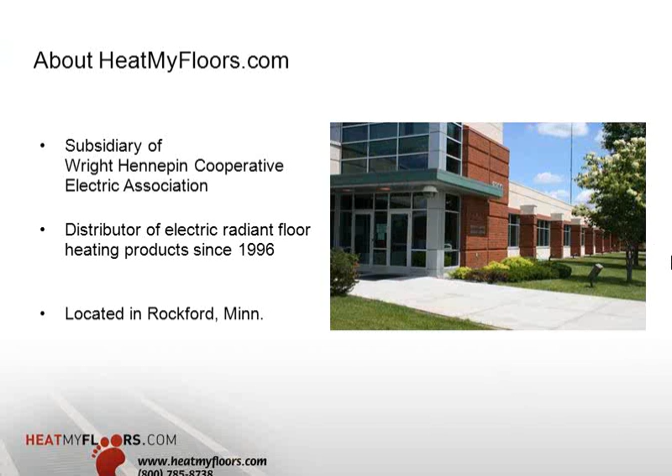Let me first talk about Heat My Floors, if you haven't joined us in the past. For some of you who've seen us already, you'll notice we're a Wright-Hennepin, an electric utility out of Rockford, Minnesota, and we've been distributing radiant floor heating systems since 1996, from electric boilers to electric radiant floor heating systems such as STEP Warmfloor. The purpose of Heat My Floors is to provide quality, energy efficient products that we believe in as an electric utility, and pass those on to our member consumers as well as customers across the nation. We're located just west of the Twin Cities. Rockford's a small town, about a 45-minute drive from downtown Minneapolis.

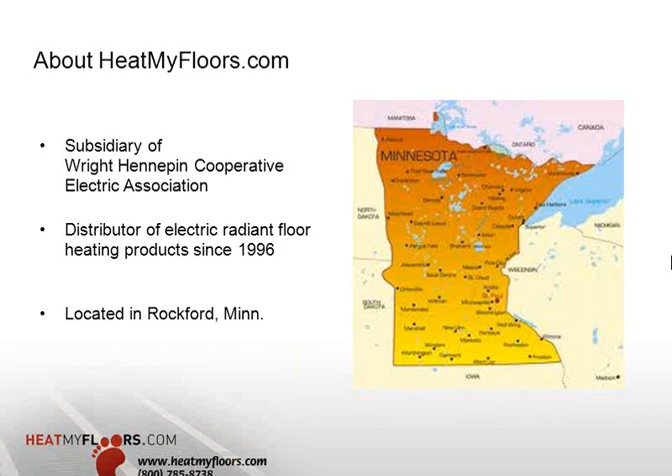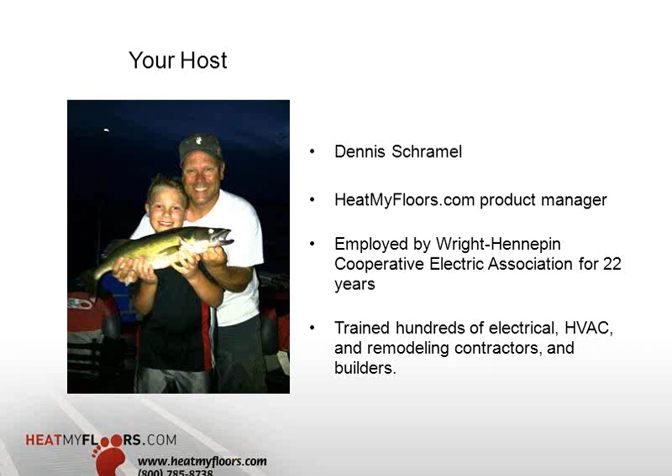Your host, me, Dennis Schramel. I am the product manager here for Heat My Floors. I've been here for 22 years and trained hundreds of contractors, electrical, HVAC, remodeling, architects, builders, you name it, regarding not only STEP Warmfloor but other radiant floor heating products. A colleague of mine said that fish I caught, that you see on the screen, is actually one I had to throw back because it was too small. So that kind of gives you an idea of Minnesota — we've got great fishing around here.

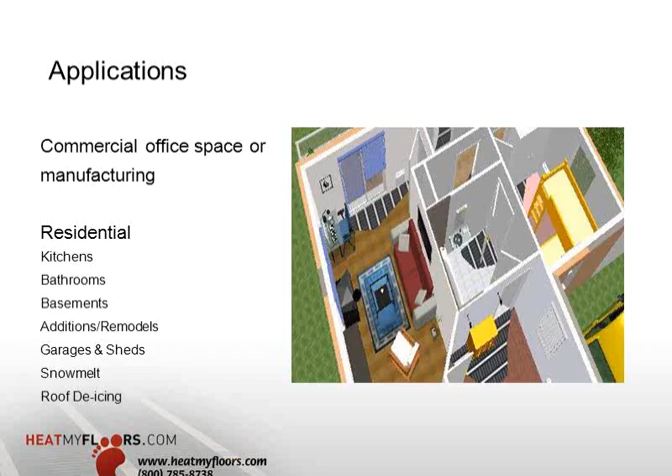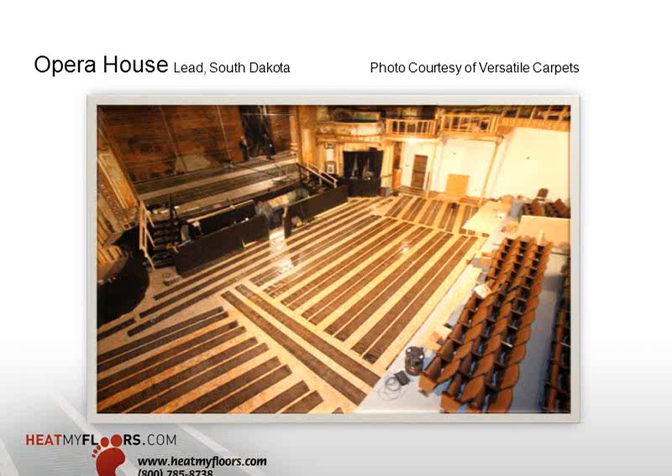Another one - my friend Tim, in Spearfish, South Dakota, has done this job with the Opera House, and you can see by the slide how nice and even the heat is. I toured this building, and it was amazing how they previously tried heating with an inefficient type of system. Now this Opera House is going to be a comfortable and enjoyed space for people in the audience as well as those on stage. Hats off to Tim - it was quite an accomplishment to see such a big job done with energy efficiency that's going to pay back the system in virtually no time.

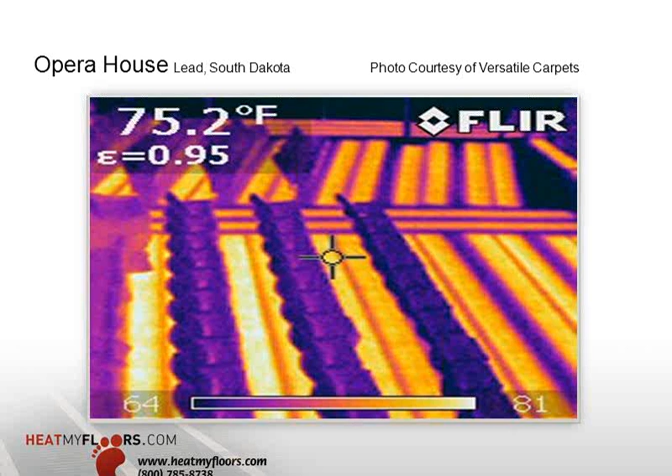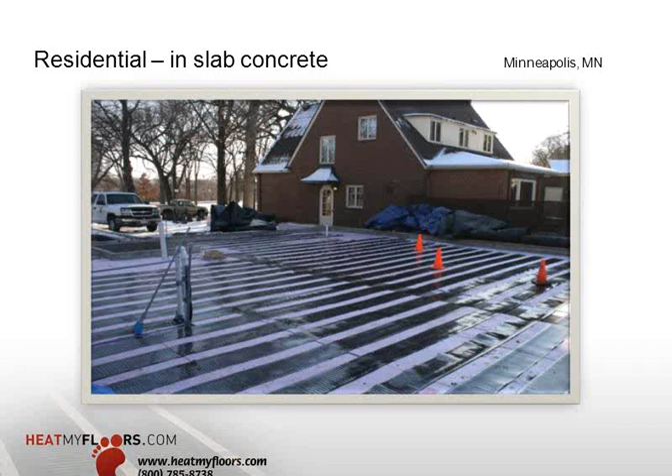Why give your business away to HVAC or hydronic guys putting water tubing in? If you're an electrician especially, this is part of the business that you used to have and dominated with cables. The cables had a period where they faltered, but STEP Warmfloor is one you're going to find is an energy efficient solution as a primary heating source for your customer's home.

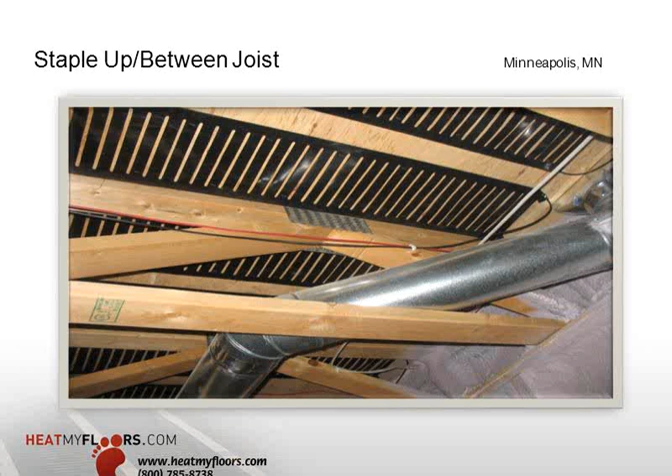How many homes have you gone to where people said, 'boy, I wish I could have put this product in'? Well, they still have that opportunity to put this in, even though they don't have to change out their tiled floor above. From a snow melt applications standpoint, I'm not going to talk about this in depth, but it shows you the wide applications STEP Warmfloor can do.

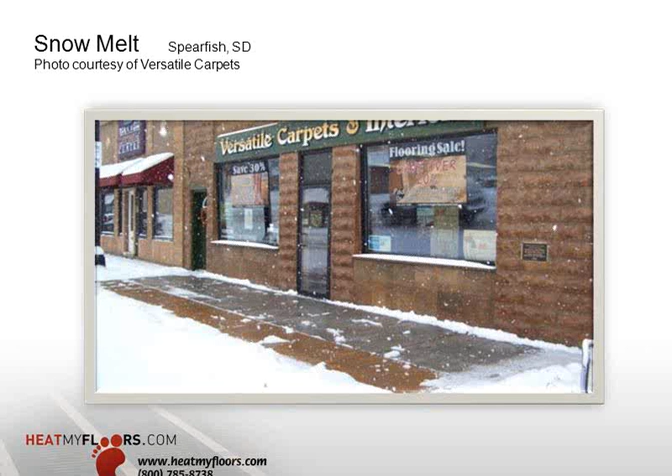What better storefront for Tim over there in Spearfish, South Dakota, to have this available so clients can see it - but you can also see his neighboring businesses still have snow on their sidewalks. It's a nice, powerful statement there, as a showroom.

And then you've got roof de-icing systems - what an aesthetic way to take care of the problem of ice dams. It's a nice aesthetic and energy efficient solution to melt those ice dams and potential headaches away.

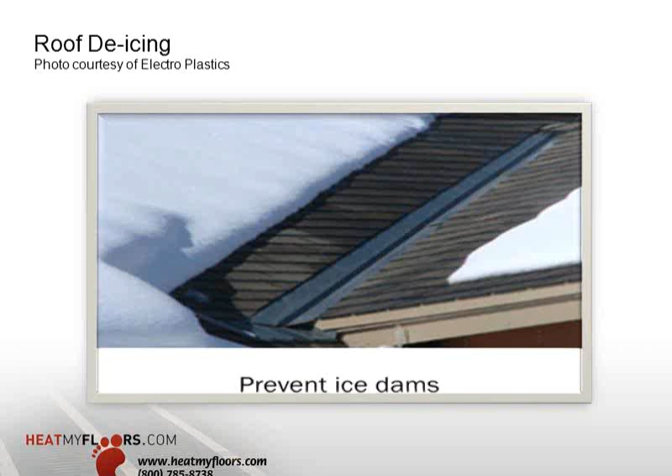All the way to unique applications like this one with RVs - our little history here is that we've been approached by a number of RV owners looking to provide comfort heating in an RV, and what a perfect solution STEP Warmfloor can provide versus their old forced air type heating systems. This particular application we're working with is going to be a primary heat source for this motorhome.

This is going to be parked down in Mesa, Arizona, and the customer is very, very excited about what they're going to be able to do and provide the heating in their RV. Even though down in Mesa it doesn't get that cold, sometimes it gets down to 35 degrees.

So STEP Warmfloor is a perfect solution. He's very excited to show off his RV to his neighboring RV neighbors out there in Mesa. So we're excited to see that project come to be.

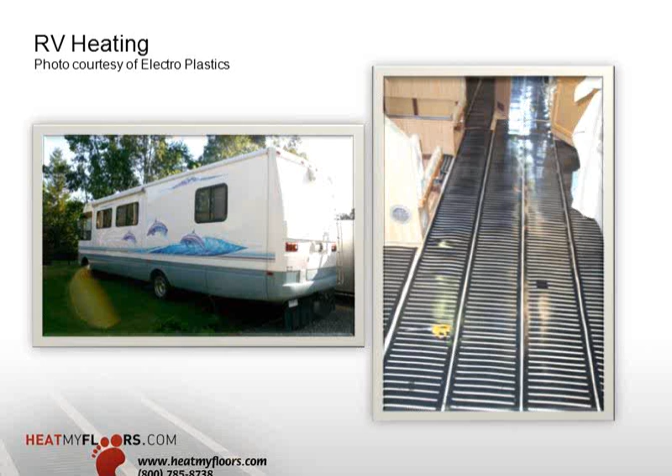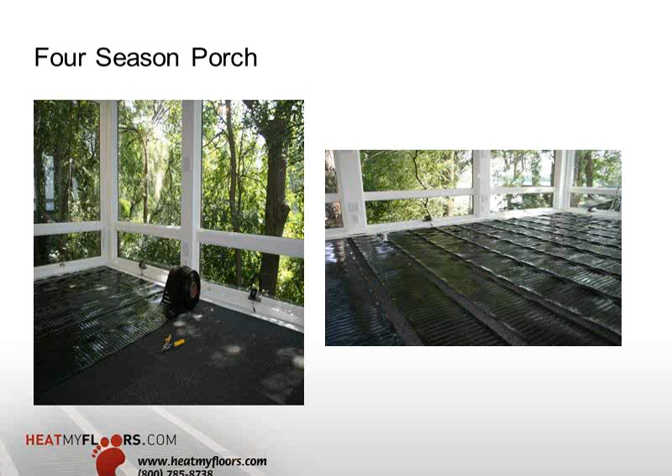All the way from four-season porches - some of these porches are virtually impossible to heat as a primary heat source because of their high heat loss loads. But STEP Warmfloor is a good way to either provide that primary heat source or a great supplemental way. Now we're going to utilize that four-season porch, what it's meant for, all year round.

This guy was so ecstatic about the whole project and how the system performed for him and the energy costs. He literally sent me the whole CD of the collection of every picture taken on every step of this project. He was so proud of it. He's very, very pleased with the results.

And obviously you got bathroom floors, and that's an application where electric radiant heating cables have dominated and found their niche for many, many years. But I've been in this business long enough, and you always hear the horror stories that contractors, tile contractors, tell about cable systems that have failed due to one reason or another. Then it's the blame game - who do you blame it on? Is it the tile guy? Is it the electrician?

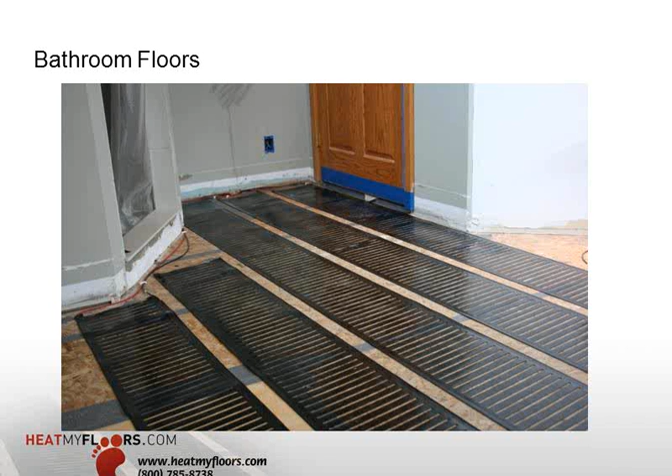So these are the main ones, and I wanted to show you tonight because of the commercial aspects of the product as well as the residential ones. So when we look at STEP Warmfloor, you may recall from the earlier webinar that we can do primary heating, whole house, new construction, or commercial, anywhere down to small bathrooms. So all points in between, from large manufacturing down to a bathroom, STEP Warmfloor is a solution for it.

Kind of covering the left-hand side of the column there, as a primary heating source, typically the STEP Warmfloor product is going to be installed in the concrete or on top of the slab. Now we're always going to suggest, or actually require, a heat loss calculation to be done - that's something you don't have to be an expert on, let us do the heat loss for you and design it, because that heat loss is so important to make sure we get enough heat capacity to provide that primary heat. The heat loss and floor coverings will determine the element spacing, and I'll cover that again on our next webinar.

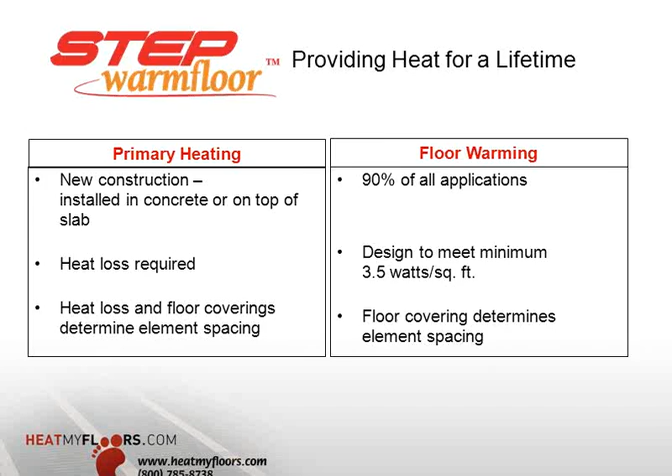So with that, the heat loss is really critical in sizing the heating needs. It's going to help us a great deal, and you don't have to worry about this—we'll take this design challenge out of your hands.

What we'll need from you is a dimensional drawing of it. A lot of times we'll get a drawing from AutoCAD sent our way, something we can use to determine the heat loss from it.

It's also very important, in your conversation with the Heat My Floors rep, that we know the job location, because we need to know the heating degree days to build into the system. Along with that, it's very important that we know the R-value of the walls, ceilings, what slab insulation they may have, the slab edge insulation. Those are all critical factors so we can size it appropriately, protecting you, the contractor, knowing the system is designed and sized right to meet the heating and comfort needs of your client.

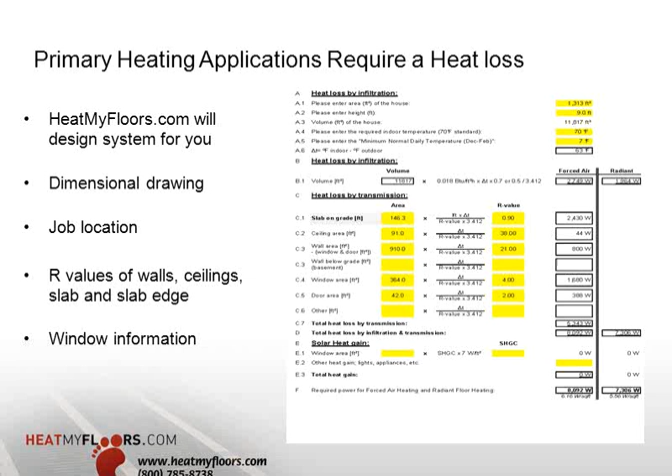Also, window information is very important. What's really unique is that the heat loss is a calculated measurement, versus what I'll show you later where manufacturers used submetering to actually compare measured data versus calculated data. It's interesting to see what their product has done, and we're conducting our own system tests here that I'll talk about in a few minutes.

So energy consumption is obviously a big thing on the customer's mind. It's not only the front-end cost—a lot of people look at that as the determining factor if they buy or sell—but you've got to really sell them on the energy efficiency side, the return on investment. With STEP Warmfloor, it's a product that's really going to put money back in their pocket after they've had that initial return on investment.

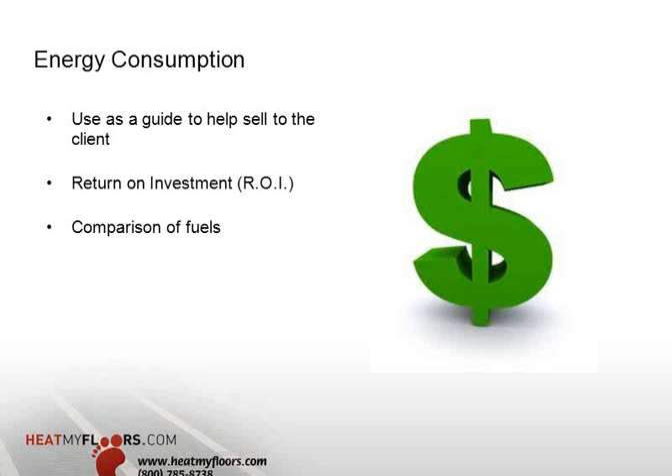Some of the tools you'll get with the design and layout include a comparison of other fuel types, or comparing electric cables with STEP Warmfloor—I'll briefly show you some of those slides too. Each one of your designs will have a system return on investment. You can see on this one it's approximately right around 2 years; we generally see between 2 to 4 years on that return on investment, which is a very good payback time.

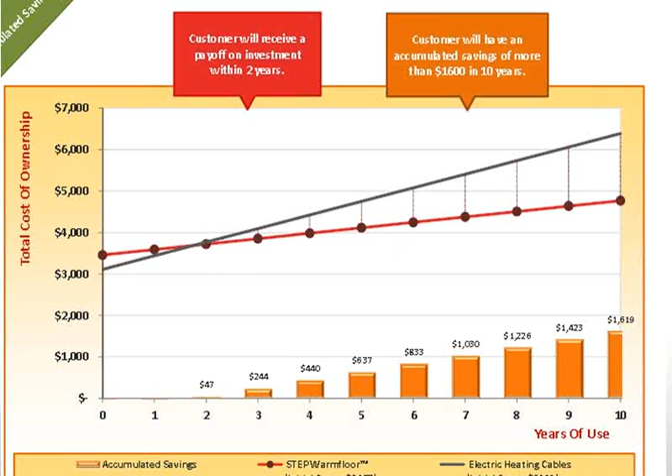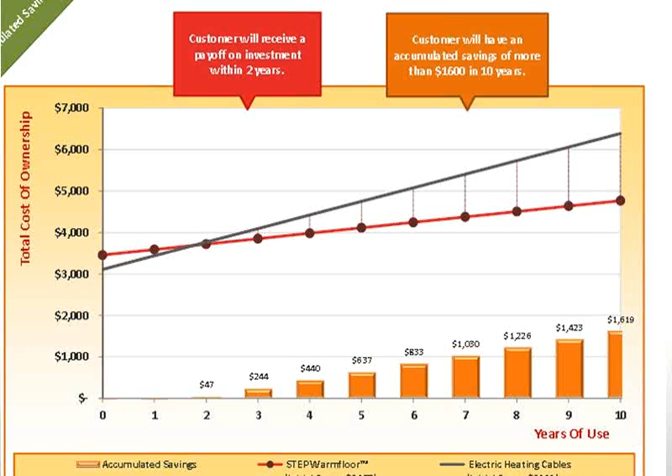This is one way you can show your client that, yes, you're paying maybe a little more premium than you would for a cable system, but you'll have that payback and the comfort of knowing the system will be there for many more years to come versus cable systems. This slide may look confusing, but it'll give you a comparison in energy, kilowatt hours, from a forced air heating system down to radiant floor heating hydronic systems, all compared with STEP Warmfloor. So you can really see the dollars based on where that person lives and the heat loss—it gives you an actual dollar amount in operational costs that can help you determine that return on investment.

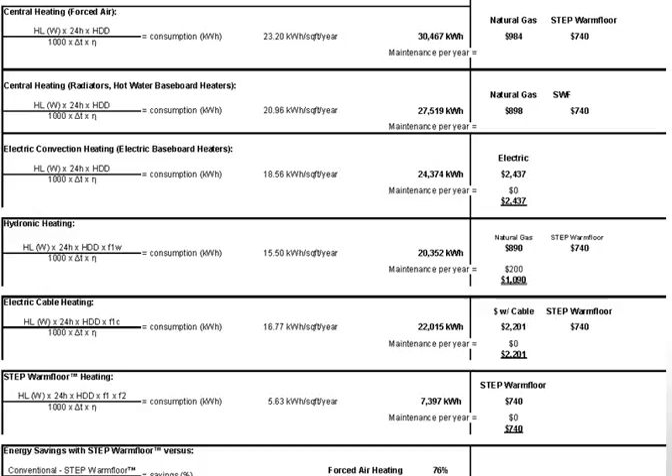Okay, we're going to jump into this commercial case study. You're looking at the building of Electroplastics, the manufacturer of STEP Warmfloor product. This building is in St. Louis, and it uses this as its primary heating system. It's comprised of a manufacturing facility and office space, just shy of 35,000 square feet.

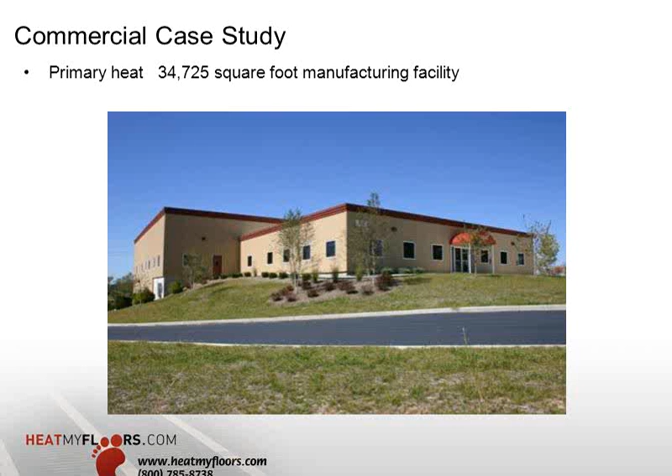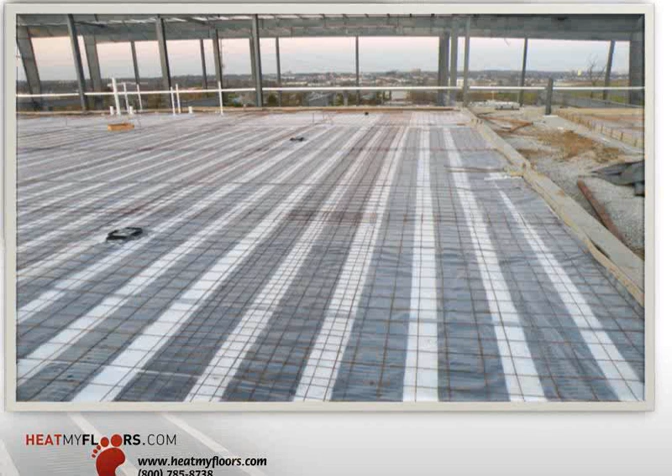In this slide, you're going to see the element being put down. Below it there's a 10 mil plastic barrier because we don't want metal touching the heating element, followed by a 4x4 mesh to reinforce the concrete and get everything nice and stable.

This gives you a nice, clear look at the spacing of the heating elements, because poured concrete is going to go over the top of this. But it's a nice, easy, clean, efficient way to heat that commercial building versus other applications.

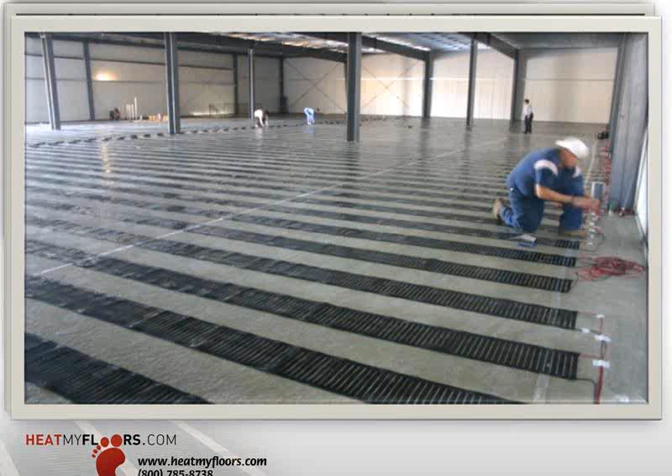Here is a picture, I believe, of the second floor. This is over Spancrete, so there's going to be a concrete pour on top of this. In the foreground you see an electrician making the wiring connections. This is a nice, easy way, and this is how they heated their entire building.

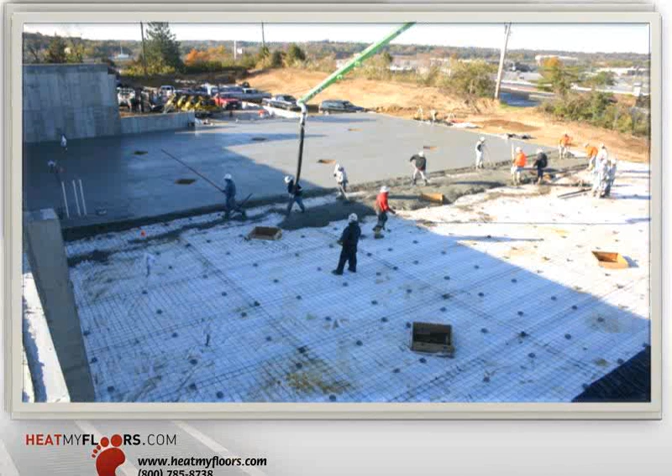There you've got the guys pouring concrete over the top of it. This building is quite fascinating to go see, and when you're actually in the space, I've been in there in the cold in February, and it's just a beautiful comfort zone. Lucky employees who get to work in there versus some other applications where they have forced air and it simply isn't warm enough.

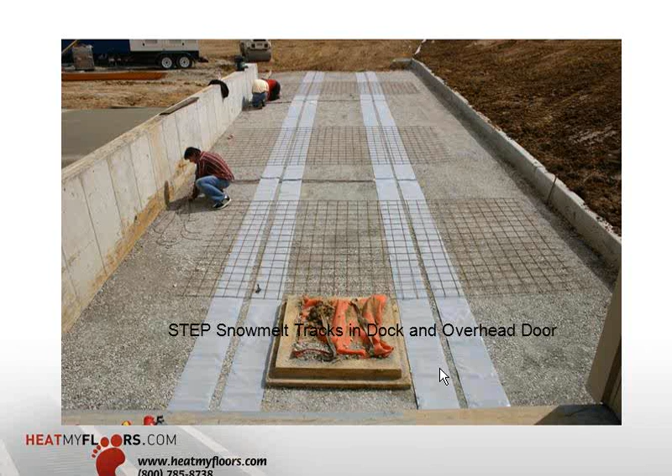This product has changed a little bit from its initial stages. Here it's in a vinyl, but now STEP has managed to put a plastic material over the heating element, so it looks quite different from what you see here, but the results are the same.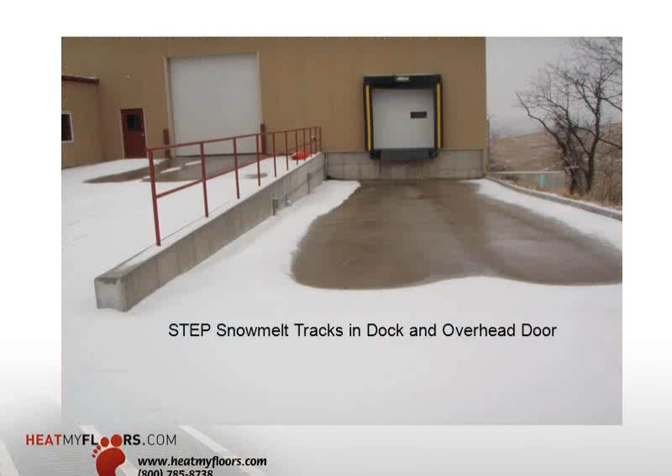What a great way to provide snow melting. They also have this in the front of their building, and you can see it does a great job. You've got two elements around where the tire tracks would be, and you can see the nice melting pattern it has on the dock doors.

The beautiful thing is in the numbers when you look at their building. The numbers really show that if you build with conservation in mind and couple it with a state-of-the-art, energy-efficient heating system like STEP Warmfloor, you can reap the rewards of low cost heating. Personally, looking at these numbers, we're at 0.73 watts per square foot.

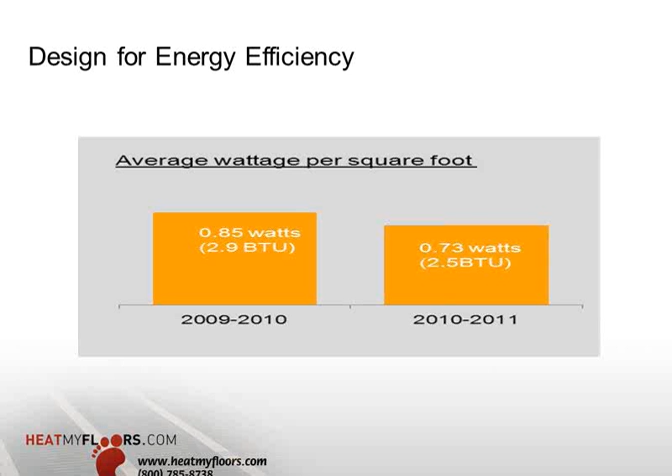The year before was a little bit colder winter. Anybody, especially in Minnesota, knows it was a colder winter in 2009, 2010. I've done some calculations on our building, which is done with geothermal heating, all forced air geothermal. Believe me, more than once the people in IT can attest to always having to adjust temperatures, because it's not zoned properly for everybody's comfort needs, whereas STEP Warmfloor is a perfect solution for an office building.

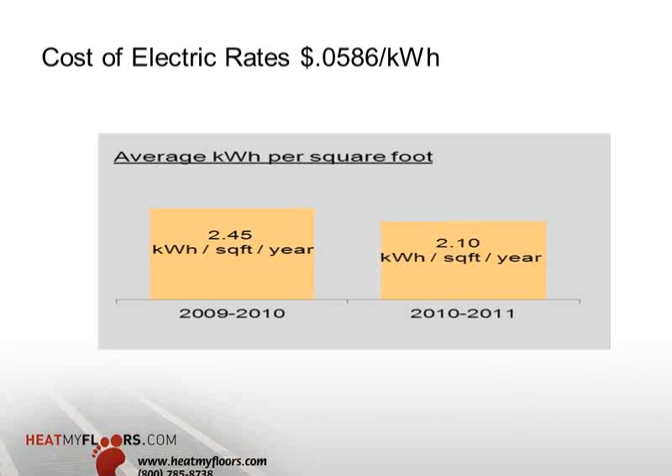Let's further touch on this. The electric rates may have changed since this was done, but it was costing about just 5.8 cents a kilowatt hour—very, very low cost per kilowatt hour. But really, it's in the next slide that tells the tale, because the energy consumption is fascinating.

You can see from 2009 to 2010, the consumption of energy was higher. The cost per kilowatt hour was a little bit lower than in 2010 season 2011, but look at the operational costs. It's amazing that you have a 35,000 square foot facility, and they're heating it for $4,164 a heating season. I've done that with geothermal in our building back in 1994 when we built it, and I was getting around $1.08 per square foot. So the bottom line is that they're spending roughly 14 cents per square foot per heating season.

It's fun when you talk to an architect and tell them about that, and they just shake their head. They've never heard of something like that. But it just goes to show you that if you have the foresight to build a building with better insulation materials, better windows, and a great heating system, your clients can achieve these dollar amounts too.

If I were to extrapolate that into Minnesota's weather and our electric rates, we'd be around 58 cents or 56 cents a square foot per heating season, which is phenomenal, because the average office building in the U.S., according to the Department of Energy, spends an average of $1.10 per square foot per heating season. So the people at Electroplastics know what they're doing, and the energy consumption of their product is fantastic.

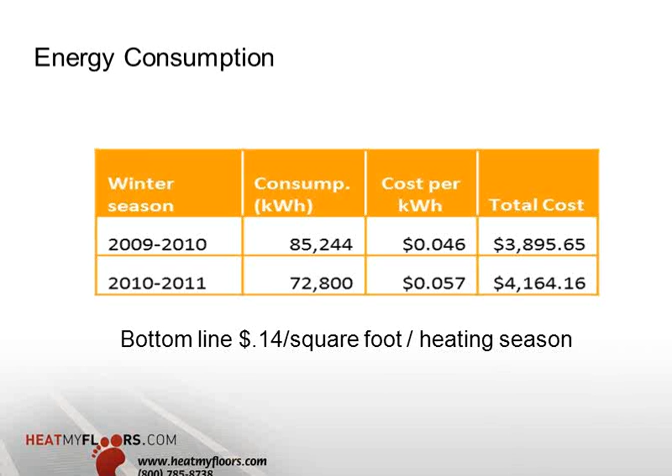We're going to jump over now to some residential applications as a primary heat source. Here is a building we had the joy to really work with an architect on and design a system for. The customer was very concerned about no maintenance, and wanted a system that could integrate with their solar panels. You might just catch the solar panels on the edge of the roof there, but there are 36 of them located throughout, and they wanted the home heated with a renewable energy source.

We did some calculations through a heat loss analysis, of course, because we wanted to ensure comfort. It's projected to heat for $740, and I'll cover a slide on that in a little bit. This home is surrounded by natural gas everywhere, yet it's total electric, and it's used as a primary heat source to heat it. What a beautiful home it is.

This is how it kind of started out. You can see the homeowner actually lives in the house in the background there as they were building, so they're really building right next to their home.

What's unique about this is that the contractor did a fantastic job. In fact, this was his first job ever with the STEP Warmfloor product, and he laid it out very nicely. Obviously, concrete gets poured over the top of this, but the key was insulating underneath it. You can see there's some 2-inch polystyrene down underneath, and then there's slab insulation, which I don't have a picture of, but it runs all along the edge to prevent heat loss from leaking out. So it was designed to provide and contain that heat.

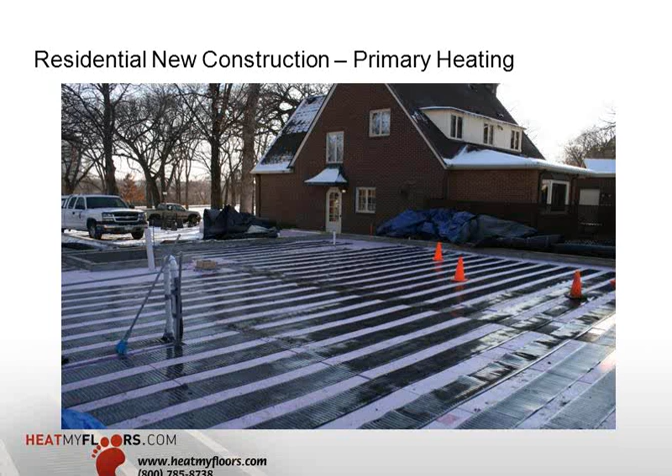So we look at these layers, and this is my own animation of what you have. You'd have your foundation edge to prevent heat from going down, then a sand gravel mix all leveled, followed by 2-inch polystyrene. You'd prep this, and many of you have seen hydronic installations where they put 2 inches of high density extruded polystyrene down, and that's a perfect way.

There's other insulation materials out there, one called the barrier that guys will use, but this one is probably a little bit more readily available at your supply stores or building centers.

But then it's followed by the heating element. Now we're containing that heat—it can't go down, and it can't go outside. So we're going to build a little mass, because now we have the concrete being poured right over the top of it. This job actually had about 6 inches of concrete, and what the contractor was so thrilled about was heating that slab up after they poured it to help aid in the curing of the concrete.

The architect, incidentally, this was his sister's house, so he wanted to ensure everything in the materials here were what she expected with a renewable heat source. They were just tickled that they could heat the system up and aid in that process of curing the concrete.

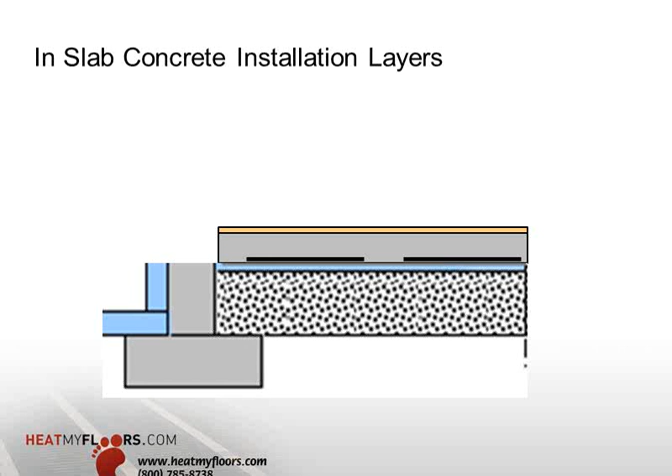Then you follow with your flooring type, and obviously you can do any flooring type—tile, carpet, bare or stained concrete, to wood floors. They happened to do a combination of carpet and a lot of wood floors. So what a great solution.

One installation tip, and this is what you're going to see—if you're doing the system for the first time, you'll learn the little things where you can build up your speed. It's kind of like riding a bike, is what I tell contractors. The first time you might stumble and fall a few times, but the second time, the third time, you're going to gain experience with the product, so you'll save a great deal of time.

One of the tips I want to let you know is you really need to refer to the design and layout that we provide for you. That's your roadmap to follow, to help you go through the layout of the element, how it appears on the floor, to the loading of the elements and how they tie to the transformer.

That is so key, and I can't tell you how many times I've talked to contractors—people out there say, oh, there's the instructions, well this is like the Christmas gift, I'll just put it in without reading the instructions. I think they get kind of confused sometimes, so they've got to go back to this, and that's the purpose of that design and layout. Electro Plastics has done such a great job in perfecting it.

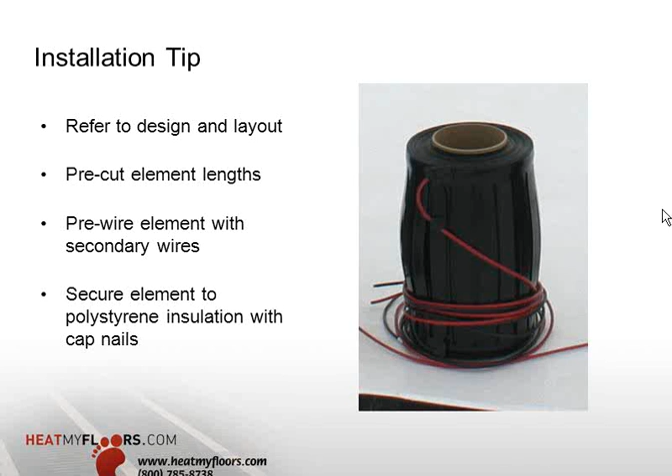And I showed you the conduit going up there too—they protected wires where they could, because you've got guys coming in there with wheelbarrows and pouring concrete. So they thought it out very nicely on their first job.

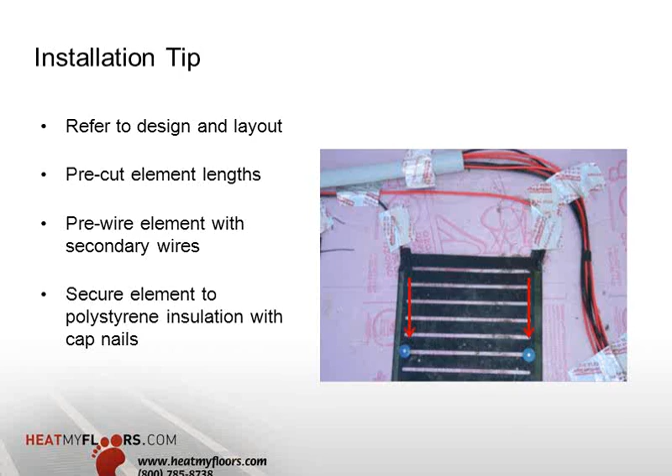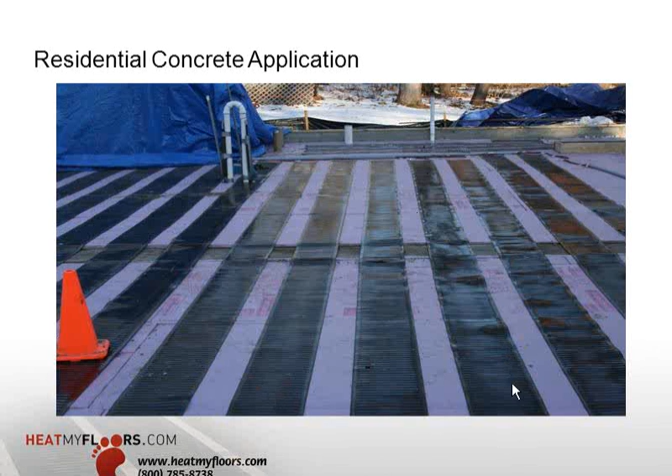This gives you an idea of the elements that are all connected on one end. Here's where the conduit runs into the transformer lines. You can see all the elements strung out there, and with this one, all the elements were connected on one end. I think they're around 28 feet, 27.5 feet long, each of these. And here's the transformer location.

Incidentally, there was 701 feet of element laid in this application that you see. They're spaced approximately 7 inches apart, which is what it called for to meet the heat loss demand and get a certain watt density.

So here's a centralized transformer. Knowing where these transformers are going to be placed is a lot easier to do for new construction as opposed to an existing home where you have a lot of finished spaces. But this was a room only accessible from the outside, so you enter into it, and there it is, all the transformers.

Now, some people may be looking and think, oh my goodness, that is a lot of transformers. But if you really took a gas furnace, sliced it all up and put it on the wall, there's no difference in size - in fact I bet it's smaller than what a forced air furnace is going to take in your home. So when they're building homes at high dollars per square foot, every part of the house is thought through, and this is a way you can utilize less space for hanging these transformers.

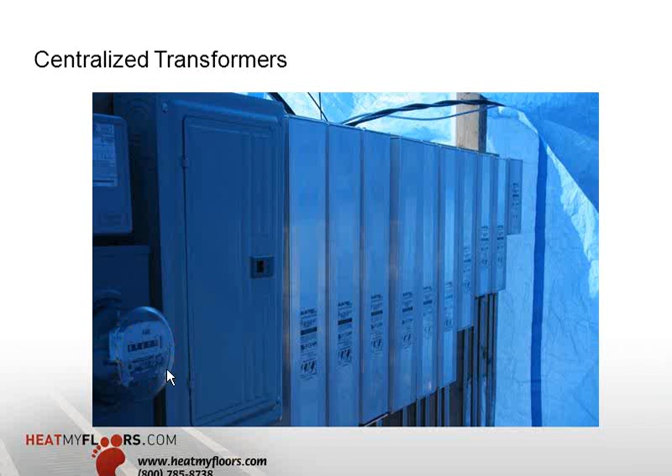I also want to pay attention to, we've got a submeter here, which is going to give us our measured energy, like Electro Plastics did in their building. We're going to find out exactly what this home is going to use, and we're going to have to wait, unfortunately, a whole year until we get all that data. We can pull that information monthly as well, or daily.

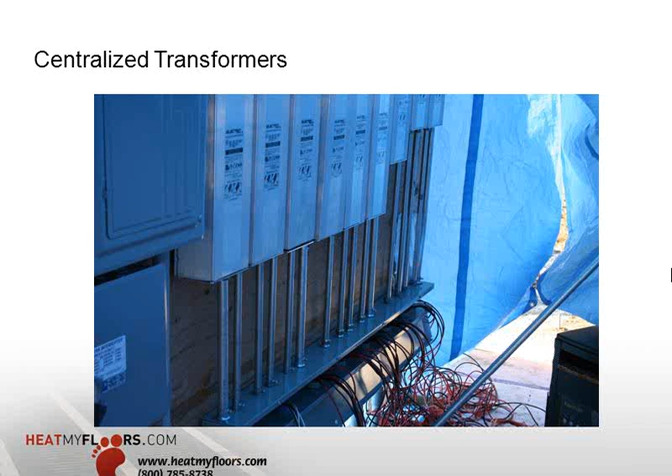So we're going to take that and see how that measures up versus the calculated cost. Again, the transformer - these guys have done buildings before, they've done big jobs. You can see how nice and neat everything is wired to a wiring trough down below, and brought in, and eventually brought up to the transformer. What a great job it was - it was a joy to work with these contractors and architects.

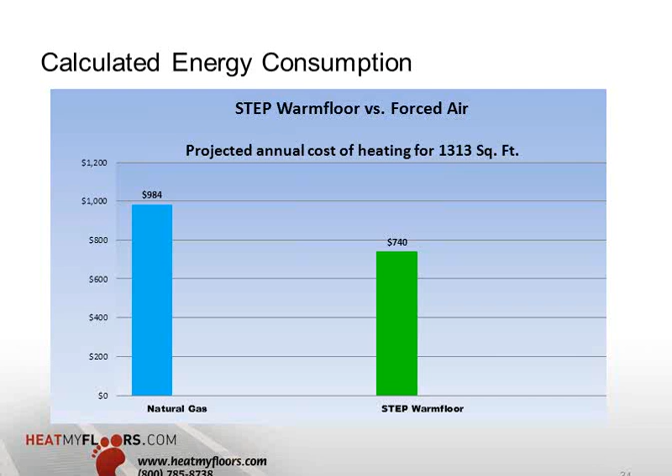So what we've calculated this job to be is around $740 using the STEP Warmfloor product, and we're heating the building at about 1,313 square feet - not a great deal of space. If we were going to heat this with forced air, again in a natural gas area, it's projected to heat around $984. So there's significant savings that go with that, but it's also the comfort side of it, which is kind of an unmeasurable type of calculation - how do you really measure people's comfort.

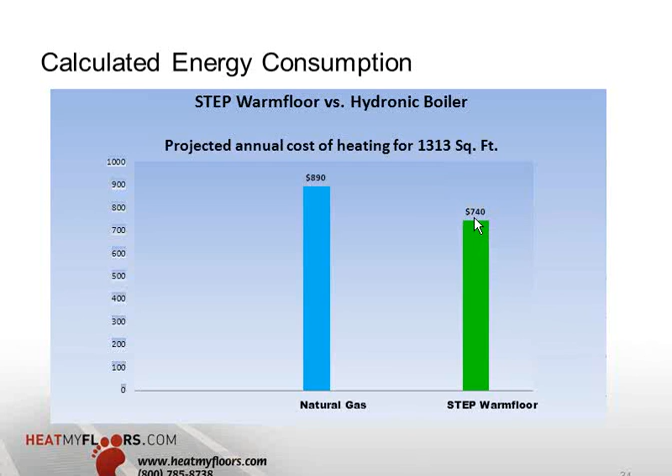Then we look at the hydronic boiler, because in the gas environment, it's easy to put in a gas boiler - that was the main competition that this particular electrician was up against. Again, you're seeing the difference in energy costs, and I'm venturing to guess that this number here will go down over time, so it'll be really interesting to see. This is the heat loss number calculated - again, that's not the measured number, and that's what it's going to tell us once that meter is put in there. So that gives you two good examples of primary heating applications using commercial and residential STEP Warmfloor.

We've gone from large industrial or commercial type manufacturing to whole house heating. So what I'm trying to say is that there's business to be had. There's business for you if you're a builder, an electrician, a flooring contractor - there's business out there that you're leaving on the table if you're not utilizing the product for so many applications.

And it's always fun to hear the stories as we follow up with our customers and contractors, and they're just so pleased with the level of comfort that the product provides. It's kind of one of those things, you may have heard me say it before - they can't see it, but boy, they know it's there, and they like it. You've all, I'm sure, experienced radiant floor heating in one aspect or another from different products, but when you can enjoy it plus enjoy the energy bill that comes with it, those are two nice matches that customers are looking for.

Moving along to floor warming applications, which is going to lead us down our path to the next webinar on floor coverings and insulation. Floor warming represents about 90% of all the applications that we sell or design for.

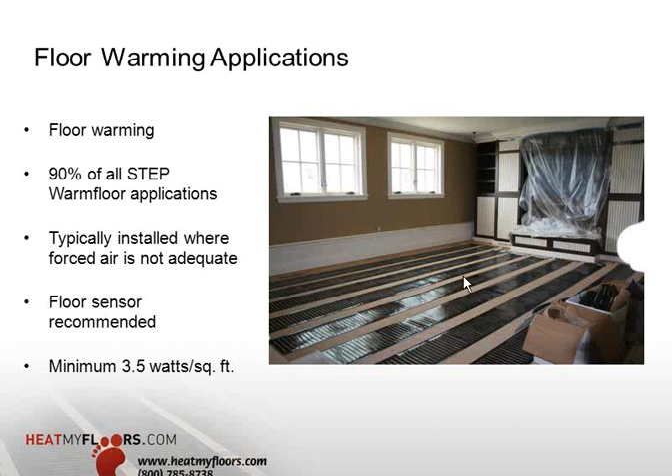We usually design for a minimum of 3.5 watts a square foot. As you can see on this application—I'll be drilling down into floor coverings later—this is a carpeting application, and we'll get into the spacing of the elements. You can see there's about a 6-inch spacing here. Incidentally, they have cork floor insulation down on the concrete floor to prevent the heat from going down.

Another system you can get involved with, an ideal retrofit system, is a staple-up, or what they call a between-the-joist method of using STEP Warmfloor. The picture really spells it out. Above there he may have had cabinets and a refrigerator—so why heat space that's going to be under cabinets? But it shows you've got some trusses in there that you're stapling the product right up to.

The key here is to insulate the joist space, making sure we put enough insulation to drive that heat through the subfloor, typically 3/4 inch, and up through the finished flooring. So you'll always hear a heatmyfloors.com representative talk about insulation, every time we talk to you, about how you're going to insulate it—and we leave it up to you.

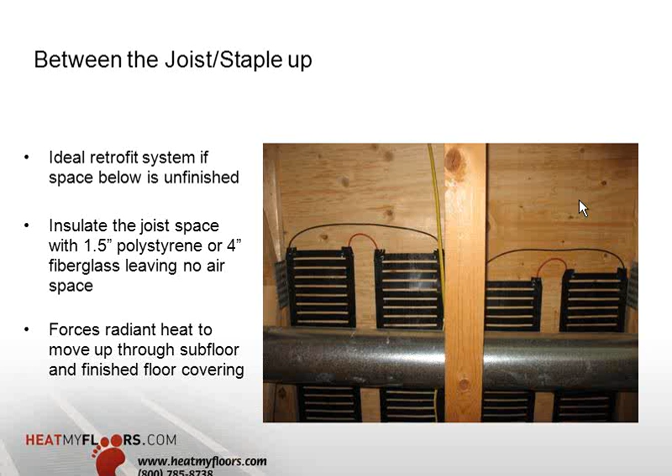Sometimes in applications below grade on concrete floors, insulation may not be needed—it depends on what part of the country you're in too. So we'll always recommend either polystyrene underneath there, or some type of insulation to drive that heat. We don't want that heat to go down.

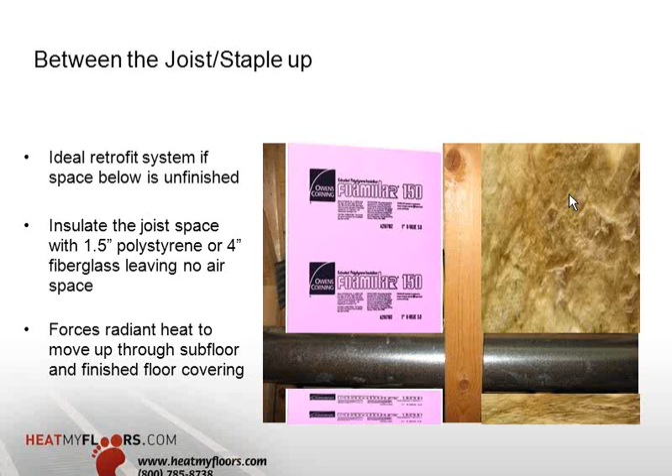Some people ask at trade shows, do I really need it? I can heat both levels. Well, when you talk to them about the law of thermodynamics, they understand that heat moves to cold. So it's very important—if you want heat to move in one direction, you need to insulate the other side of it. We'll cover that a great deal.

What I really want to tell you is to utilize the experience of Heat My Floors. Our reps here have a great deal of experience working with a number of radiant floor heating applications with STEP Warmfloor. Utilize them, and if they don't know, they'll get the answers from the manufacturer, who has been fantastic to work with in getting down to the answers.

Contractors out there really know good communication between the trades is the key to successful installation.

That's no different with STEP Warmfloor. Typically with cable systems you dealt with either the electrician to hook up the 120, 240 volt voltage, and then the flooring contractor going over, maybe the electrician laid the floor. Well, here with STEP Warmfloor, you have other layers in there that you need to communicate with.

Because it could be the builder. Where are you going to put these transformers or places for this? Is the flooring contractor, what flooring is going to go over this? Is it going to be tile? Is it going to be carpet? Is it going to be wood? Are they looking for primary heating or floor warming?

So these are all key things that you need to be asking yourself and communicating to others on the job site to make sure that the installation is successful.

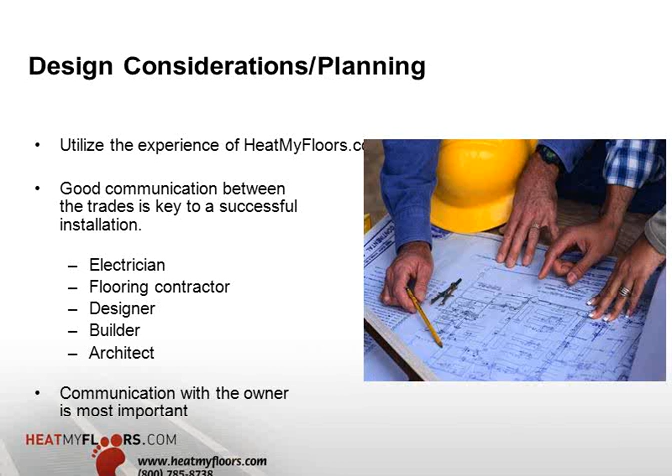So if we communicate, we can ensure that the customer is going to be utilizing the product for this project and for other ones to come.

So preparing your warm floor proposal, we're going to get into the floor coverings and the wiring here on the next webinars, but you really want to study the STEP Warmfloor designs and layout worksheets. Again, I can't stress that enough. They get sent out to the contractor, they get sent on the job. It's very important that you understand and look at them, because it really gives you your roadmap to follow to make the installation easy.

Another thing you want to plan is the location of the transformers and thermostats. On new construction it's going to be easier to plan for wall locations, but you also need to be thinking about these transformers, where they're going to be located, especially in a retrofit existing home, that you need to hide them in some way. Believe me, these are nice transformers, but you don't put them in a China hutch.

So it's something you want to plan and put in a wall, under the stairs, and I'll have some slides in our 4th webinar series that'll tell you some neat, unique ways to hide those and still be closer to the load, because we have to be concerned about voltage drop.

Another one we kind of covered is to consider pre-cutting the element and wiring to save labor on the job. In fact, we're doing a Bath Crashers TV show here tomorrow. This is one where we normally would have contractors doing the work, but we're out there helping with the show.

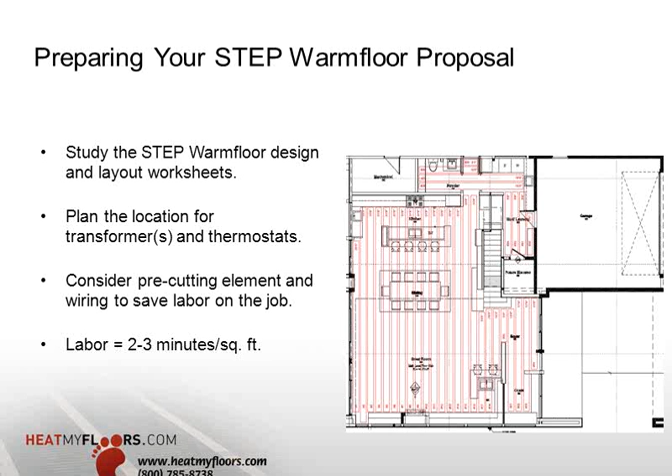Typically 2 to 3 minutes a square foot. Now you're going to find your speed. Remember, we're going to ride the bike, we're going to fall off it a few times, but you're going to work your speed up over time. So 2 to 3 minutes is probably going to be pretty close, but I can venture to say you can be in that 1 to 2 minutes per square foot in no time.